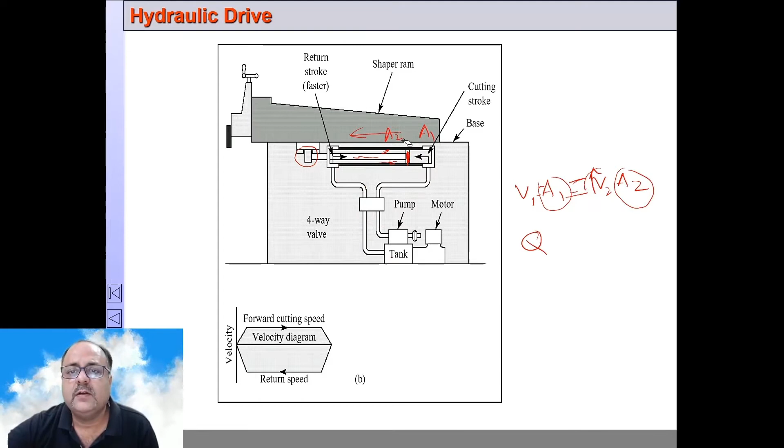Now why this is a quick return mechanism is because the cross section area here and the cross section area here have a difference. If this is A2 and this is A1, then V1 A1 is equal to V2 A2, we know from the continuity equation. So A1 is high and A2 is low. A2 is low because some of the area is occupied by the piston rod. The piston rod is deliberately made larger so that A2 is decreased. When A2 decreases, the discharge Q remaining constant, V2 has to increase. Therefore, the return stroke is faster. So this is how quick return mechanism is achieved.

Now there are some inherent advantages of the hydraulic shaper. Look at the graph. Here we have a fairly constant velocity. This is ideally wanted in machining. You want a constant cutting speed. The return stroke is faster, but still it is constant. Whereas in a mechanical shaper, it was somewhat like this. This is the forward stroke, and the return stroke was higher, like this. So a much better surface finish is given in a shaper machine with hydraulic drive.

And also, in a hydraulic drive, because of the hydraulic oil present on the other side during the return stroke, it has a cushioning effect. Whereas in a mechanical shaper machine, there is jerk at the end of each stroke. But here at the end of each stroke, since there is hydraulic oil on the other side of the piston, there is a cushioning effect.

And in a hydraulic drive you can vary the range of speed infinitely. The speed can be varied infinitely by varying the discharge, the area remaining constant. There is a relief valve, and if the pressure somehow increases beyond the design pressure of the hydraulic oil, the relief valve will open and the machine will stop immediately. So there are inherent safety features in a hydraulic drive. So obviously the hydraulic drive is much better compared to the mechanical drive, and of course it is much costlier.

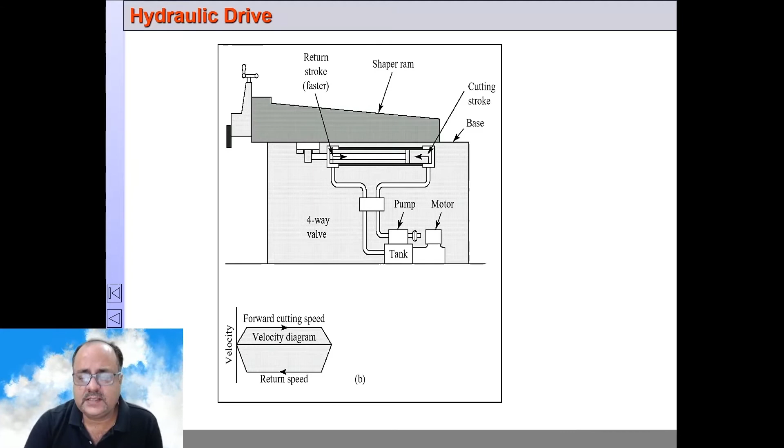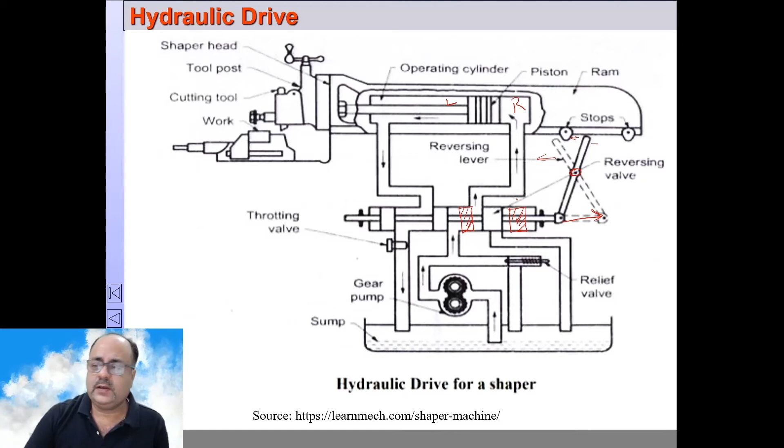Again at the end of the stroke, this will move forward, and this will come again to the proper position. So this continues. So this is the working of a hydraulic drive.

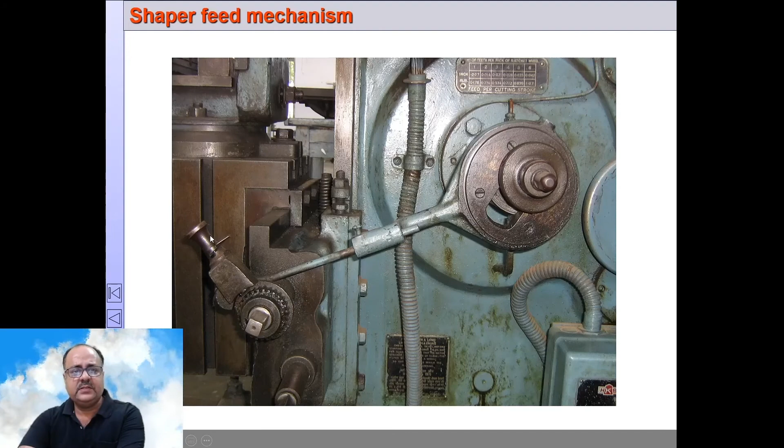See, this is eccentrically mounted to a disc, and there is a connecting rod connected to a rocker arm, and the rocker arm has a pawl which is slanted on one side and straight on the other side. You can change it by lifting this and rotating it, changing its position from this direction to that direction. It engages the indexing ratchet wheel. This is the wheel on which it is fixed currently.

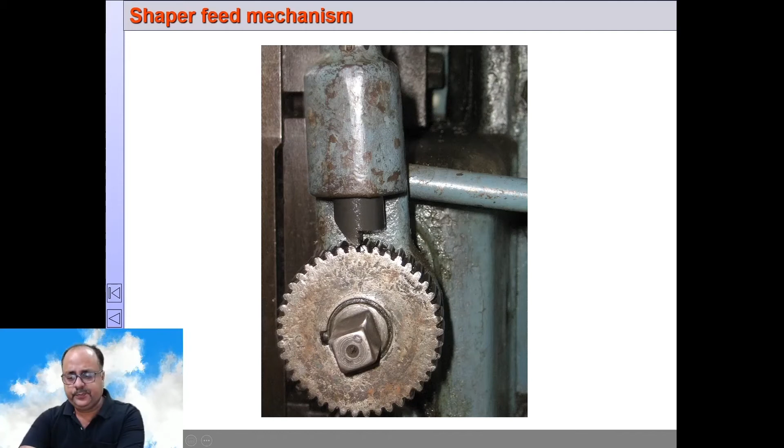There is a spring-loaded pawl here. Currently it is fixed in this position. Now during one half of the rotation, the rocker arm will rock in this direction.

Now, as this rocker arm rocks in this direction, this is a slant edge, so this will slip over these teeth, and during the second half of the rotation it will rock in this direction. So when it rocks in this direction, here we have a positive drive; this is straight, and this will rotate in this direction.

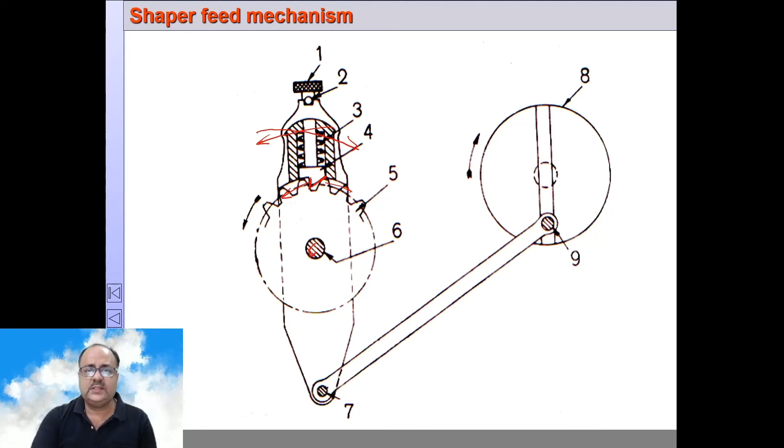As this rotates in this direction, this shaft will rotate and the cross slide will rotate, giving a feed to the table. That means the table will move with respect to the cutting tool, and a feed is provided to the cutting tool. So this is how the feed mechanism of a shaper works.

What are the shaper operations? I am not going into details of the operations. These are practical aspects. You might have done it in the practical, or you might be doing it in the practical. Machining a horizontal surface, machining a vertical surface, machining an inclined surface, cutting slots and keyways.

Okay, now the cutting speed, feed and depth of cut. Before we go into that, what should be the stroke length? Let's say this is the length of the workpiece. Now we start slightly ahead, which is called approach, and slightly over travel, that is called over travel length. So total length is equal to LA plus L plus LO.

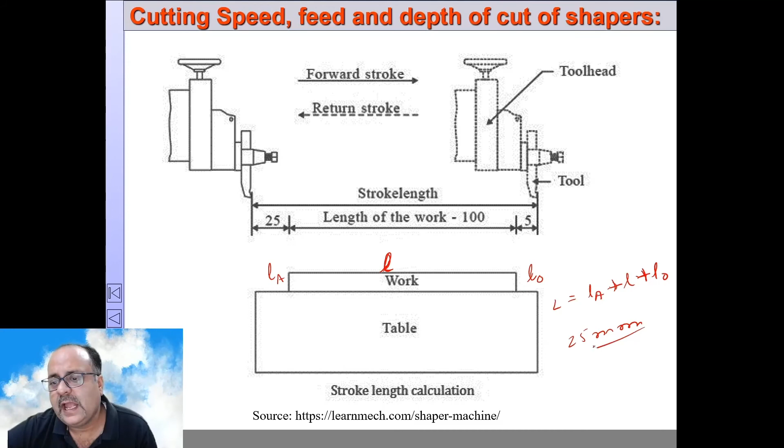So normally we take around 25 mm as approach length and over travel length. With this knowledge, we'll move on and find an expression for the cutting speed. It is the speed with which the ram reciprocates, and that can be found out by finding the length of the cutting stroke. It is expressed in this L that we have found out in the previous slide.

It is in mm, so we convert it into meter by dividing it by 1000. So it is L by 1000 V. So time taken by the cutting stroke will be L by 1000 V, or V is equal to L by 1000 T, and T is the cutting stroke time in minutes. And normally this data M is provided: return stroke time by cutting stroke time is equal to M.

So after the cutting stroke time, we can find out the return stroke time. The return stroke time plus cutting stroke time will be the double stroke time. So if we can find out the double stroke time, 1 by double stroke time will be the RPM. From that we can find out the velocity.

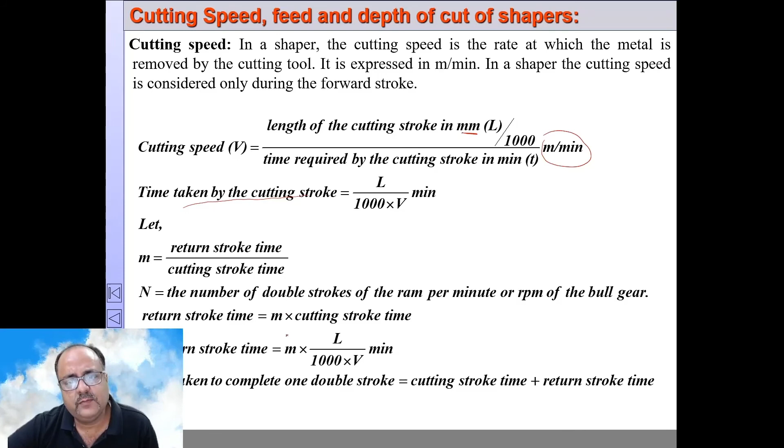So return stroke time will be M into the cutting stroke time. So then the double stroke time will be cutting stroke time plus return stroke time. So it will be L into 1 plus M by 1000 V, and the reciprocal of this will be the RPM of the bull gear. So N will be this, and from this expression we can find out V is equal to this.

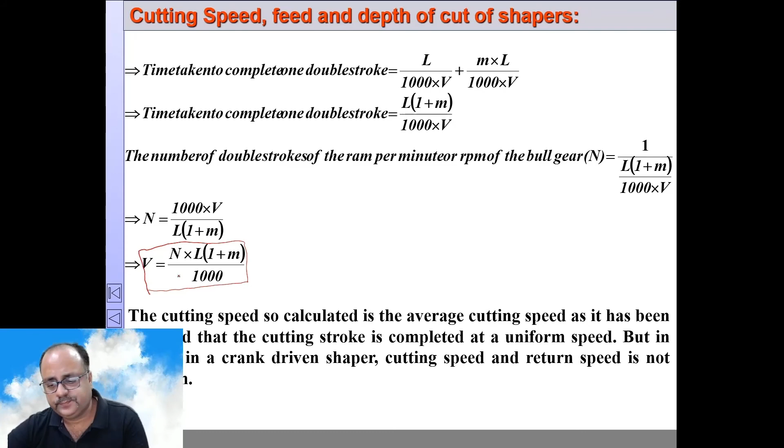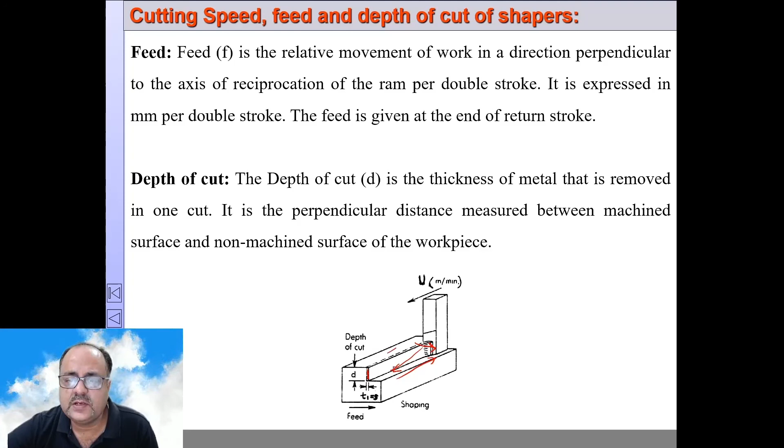Feed is the relative movement. Let's say this is the feed. See, it is cutting in the forward stroke, and during the return stroke the workpiece will move slightly in this direction, and how much it moves per double stroke, or per cycle, or per revolution of the bull gear is called the feed of a shaper. And depth is the perpendicular distance between this surface and this surface, called the depth of cut.

So that's it on the shaper machine. I hope I am able to clear the concepts.